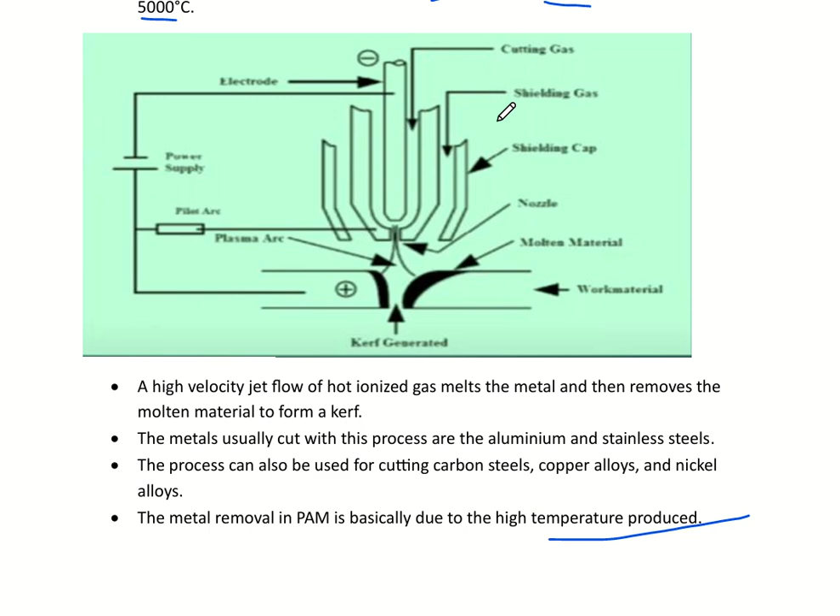This is due to anode heating. Why is it called anode heating? Because as you can see from the circuit, the workpiece is the anode part and the electrode is the cathode part. So it is the anode that is getting heated. The heating of the workpiece results from anode heating due to direct electron bombardment, as the electrons are bombarded due to the very high velocity and high temperature plasma that accompanies it.

The heat produced is sufficient to raise the workpiece temperature above its melting point, and the high velocity gas stream effectively blows the molten metal away. The temperature supplied should overcome the melting point of the workpiece. Then the thermal machining process occurs, and the molten state is formed. The molten metal formed is removed by the high velocity jet from the gas supply. So this is actually machining, and the removal is done in the same process. That's a specialty of plasma arc machining.

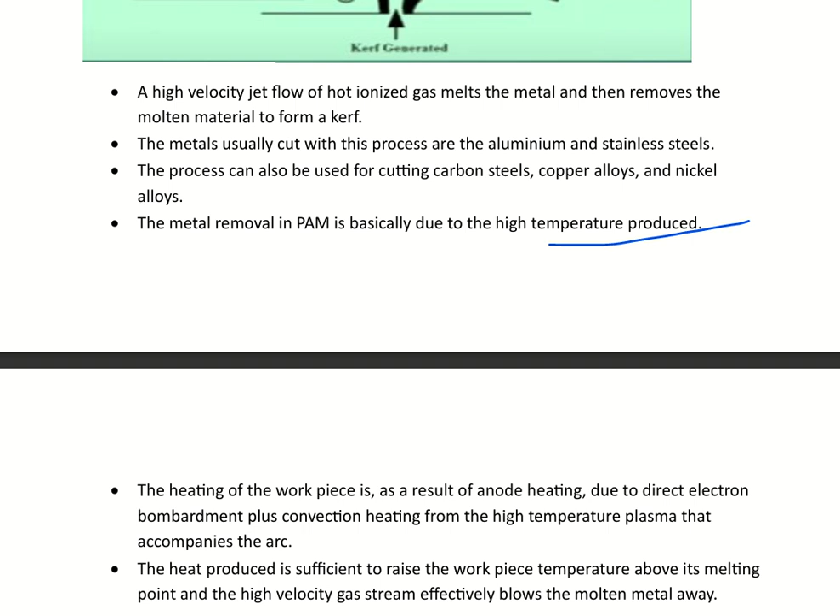There are two types of plasma arc machining: transferred plasma arc machining and non-transferred plasma arc machining. This is the figure of transferred plasma arc machining. Just like the figure, we have the electrode, a nozzle, and plasma gas. Look at the gas supply, you can see the plasma is formed there.

There is a workpiece. The major difference is that the plasma jet can be operated in the transferred mode, where the electric current flows between the plasma torch electrode and the workpiece. There is a continuous supply. The plasma torch electrode is the negative terminal of the power supply, so it is the cathode, and the workpiece is the anode. So there is a complete circuit; electric current flows through this circuit, completed from the plasma torch.

You can see the workpiece is connected to the anode, so obviously this will be a complete circuit. In the transferred system, the whole circuit, the arc, is complete by making contact to the workpiece. As you can see, the circuit is complete because the anode is connected to the workpiece. So the arc is completed by making contact with the workpiece. That's an important point of transferred plasma arc machining.

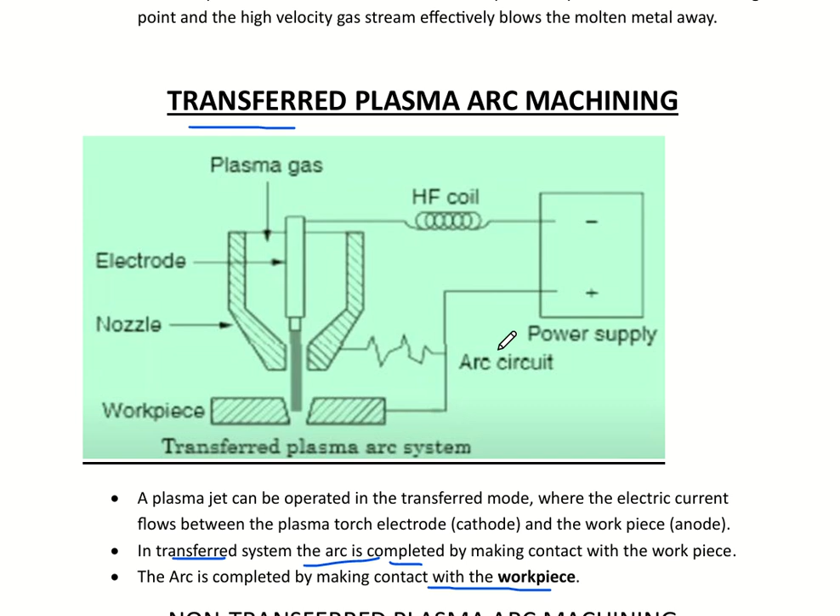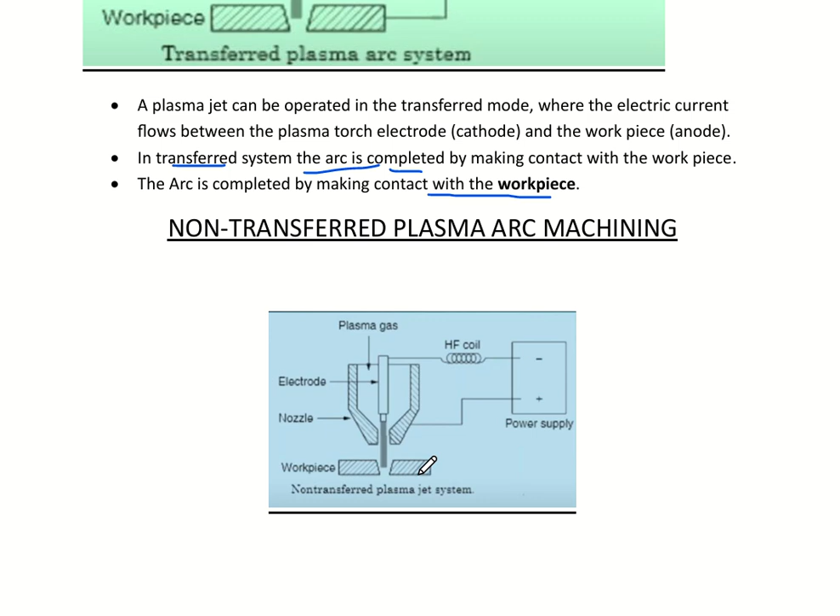The remaining working principle is the same as general plasma arc machining. In transferred plasma arc machining, the whole circuit arc is completed by contact to the workpiece. In non-transferred plasma machining, as you can see, the power supply circuit is completed with the nozzle, not the workpiece. The whole arc circuit is completed with the nozzle.

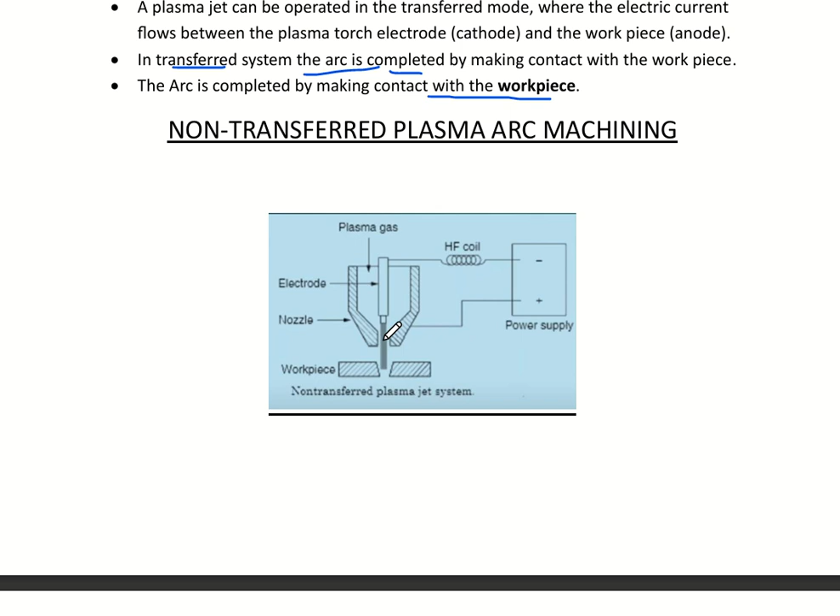A plasma jet can be operated in the non-transferred mode, where the electric current flows between the electrode and the torch nozzle. Here the current flows between the electrode, torch, and nozzle, whereas in transferred plasma machining it flows between the electrode, torch, and workpiece. That's the difference between transferred and non-transferred plasma machining.

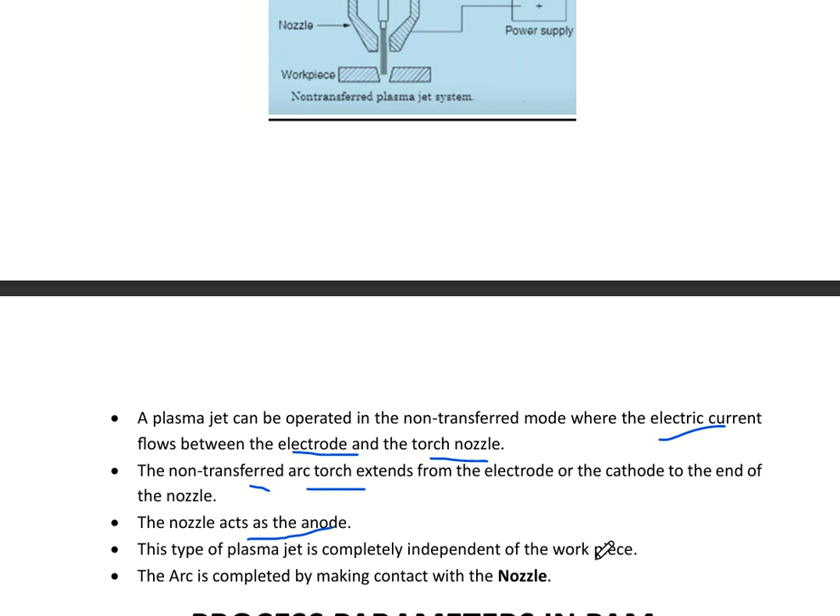In non-transferred plasma machining, the arc extends from the electrode or cathode to the end of the nozzle. The nozzle acts as the anode. In the previous case, the workpiece acts as the anode, but here, in non-transferred plasma machining, the nozzle acts as the anode. This type of plasma jet is completely independent of the workpiece, as you can see, it's not connected to the workpiece.

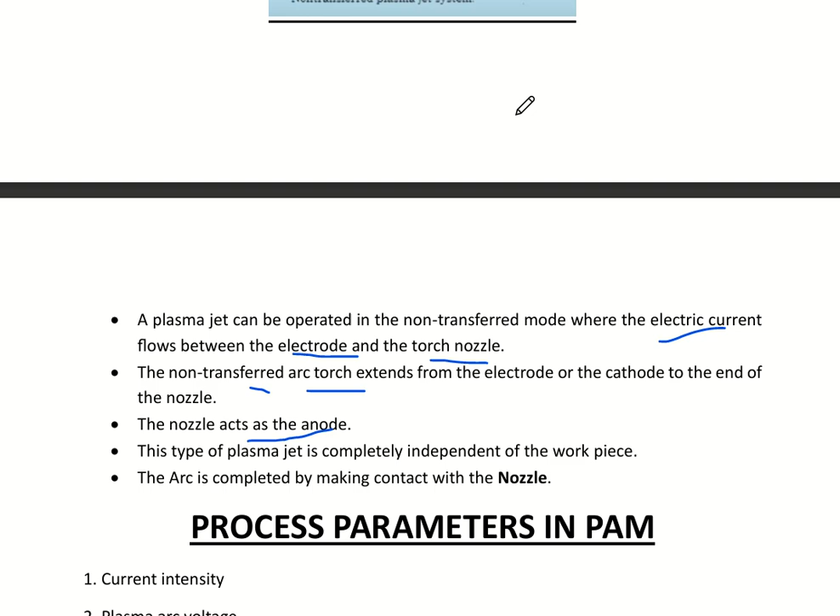The DC power supply is not connected to the workpiece, so this does not depend on the workpiece. The non-transferred plasma machine does not depend on the workpiece; the arc is completed by contact with the nozzle. These are the major differences between transferred plasma arc machining and non-transferred plasma arc machining.

Let's discuss the process parameters. What are the parameters that influence plasma arc machining? Obviously, current intensity of supply. The DC power supply depends on the intensity of the plasma, or the heat used for machining. The plasma arc voltage, then the properties of the workpiece, such as its melting point, the temperature at which it melts, obviously affects the machining. So the properties of the workpiece is one factor.

Thickness of the workpiece, whether it has larger or smaller thickness, is another factor. The gases used along with the electrode to form plasma, and the flow rate of the gas supply, as mentioned, the jet velocity or flow rate, is one of the influential factors. Then the working speed, the speed at which the whole machining process takes place.

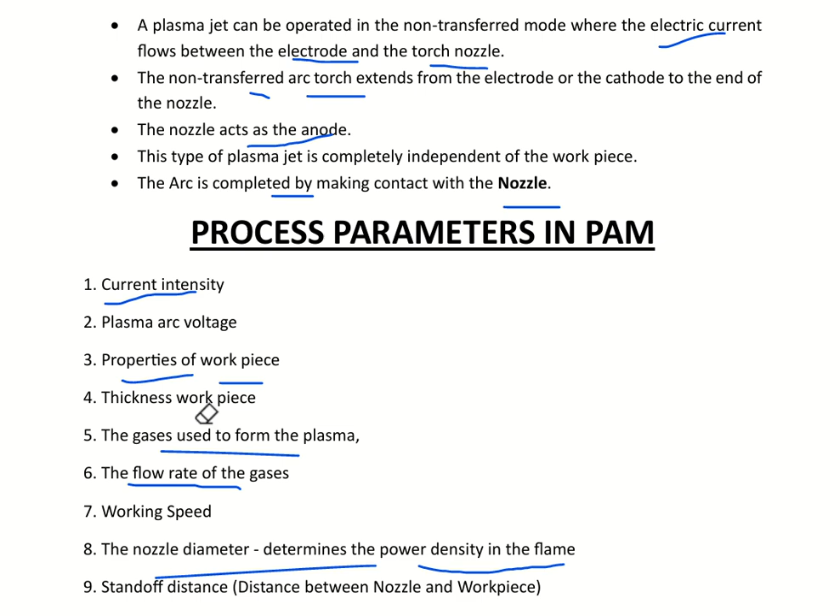Then the nozzle diameter, which obviously affects the velocity of the jet. The nozzle diameter determines the power density in the flame. If it has a very small diameter, it will have a very high plasma power density, so it could machine with very high intensity on the workpiece. Then the standoff distance, meaning the distance between the nozzle and the workpiece. These are the process parameters in plasma arc machining.

Up next, the material removal rate. This is a thermal machining process, so metal removal takes place in a very large quantity. Metal removal rate increases with the current, but also depends on the cutting speed, gas flow rate, and thickness of the work. These are different factors that influence the metal removal rate.

It is directly proportional to the current supplied for machining, and it also depends on the cutting speed and other factors such as gas flow rate and thickness of the workpiece. The supply of current range required for this metal removal rate is 800 ampere to 1000 ampere.

Higher the value of cutting speed, more the volume of material removed. If you're having very high cutting speed, more material will be removed. So the volume of material removed is higher with respect to the value of the cutting speed.

Cutting speed depends on the thickness of the workpiece material you are cutting, the workpiece property, and surface speed of the material. If you have to use a very large cutting speed, you have to look at the properties of the workpiece, whether it has a small or large thickness. The workpiece material property affects the cutting speed, and a proportion of 10% hydrogen, 90% nitrogen usually gives good general results.

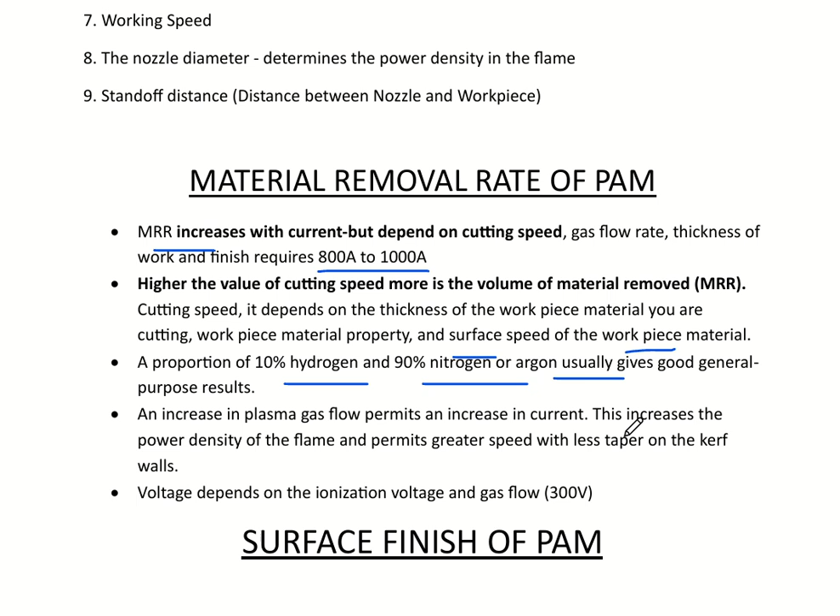These are the process parameters for a better metal removal rate. An increase in plasma gas flow permits an increase in current, and this increases the power density of the flame, permitting greater speed with less taper on the kerf walls. There will be taper on the kerf, which I will explain in the next slide. Voltage depends on the ionization and gas flow. So this is all about the metal removal rate and certain factors related to it, and how it influences metal removal rate in plasma machining.

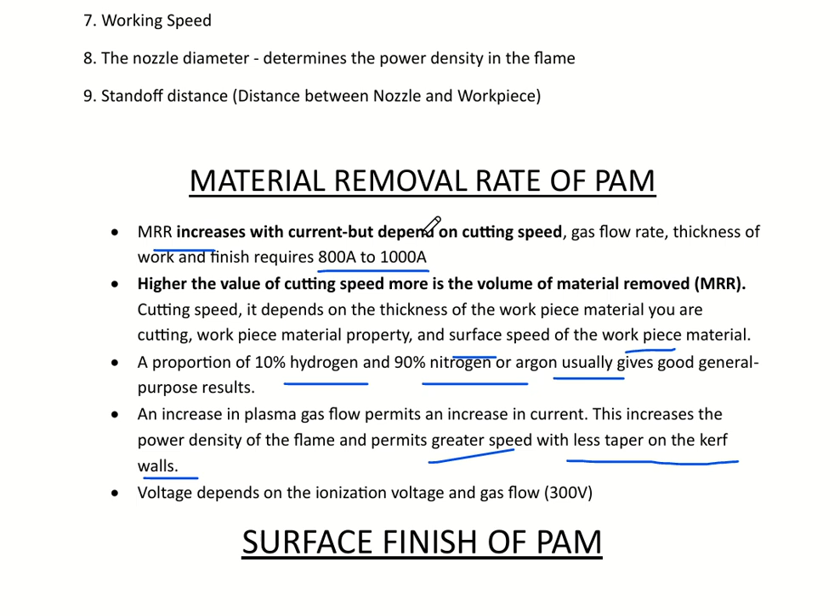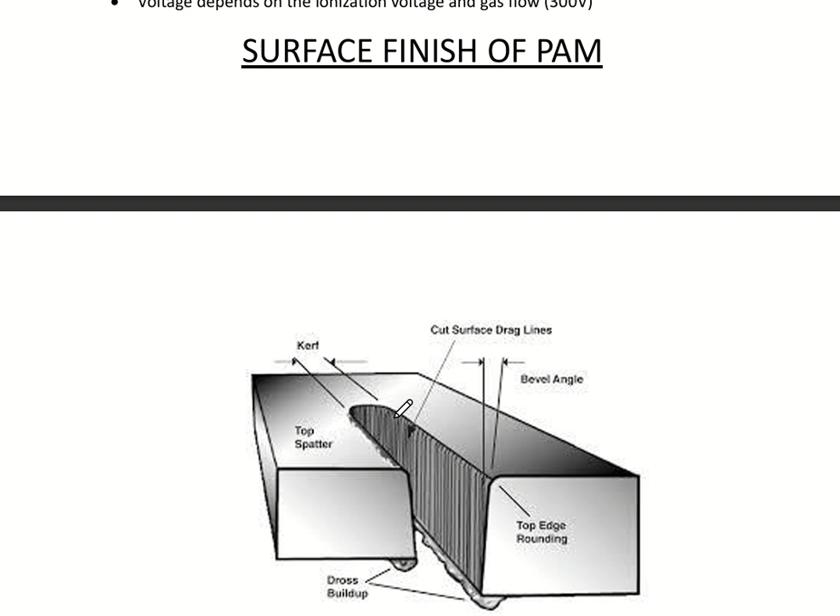Then surface finish of plasma machining. This is a machined surface, and this part is what is called the kerf. You can see this part is machined, and the machining is usually in a tapered manner - it could not be a perfectly straight cut. So there's a tapered manner down here; this cut part is called a kerf in plasma machining. The quality of cut and dimensional accuracy produced by plasma machining can be assessed by measuring the kerf width, depending on how much kerf width we are machining.

The heat affected zone, the surface finish and the metal removal rate are all factors that determine the quality of cut and the dimensional accuracy of a machined workpiece in plasma machining. The arc current and arc voltage are found to be the most significant parameters among many factors determining the quality. Other factors include torch standoff - the distance between the torch and workpiece - angle to work, and depth of cut.

A lower value of current and voltage was found to produce better surface finish. An increase in thermal content of the arc was observed to spoil the surface finish and increase the kerf width with an increase in the heat affected zone.

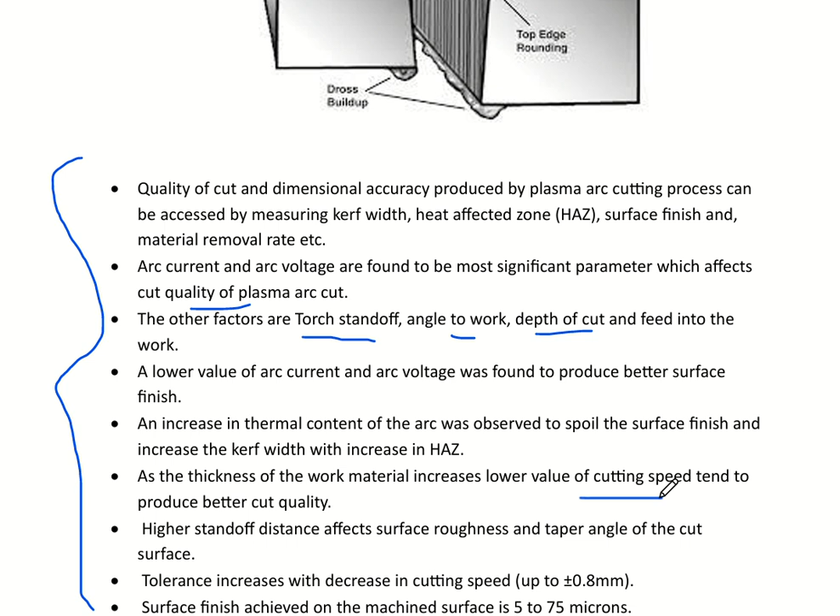As the thickness of the workpiece increases, a lower value of cutting speed tends to produce better cut quality - the machining process will be much slower, but you will get a better cut quality. If the thickness of the material is very large, you should use a lower cutting speed to get better quality. Higher standoff distance affects surface roughness and the taper angle of the cut surface.

The tolerance increases with a decrease in cutting speed - tolerance meaning you won't get a perfectly precise cut; there will always be some tolerance range, and it decreases with cutting speed. Surface finish achievable on the machined surface ranges from 5 to 75 microns.

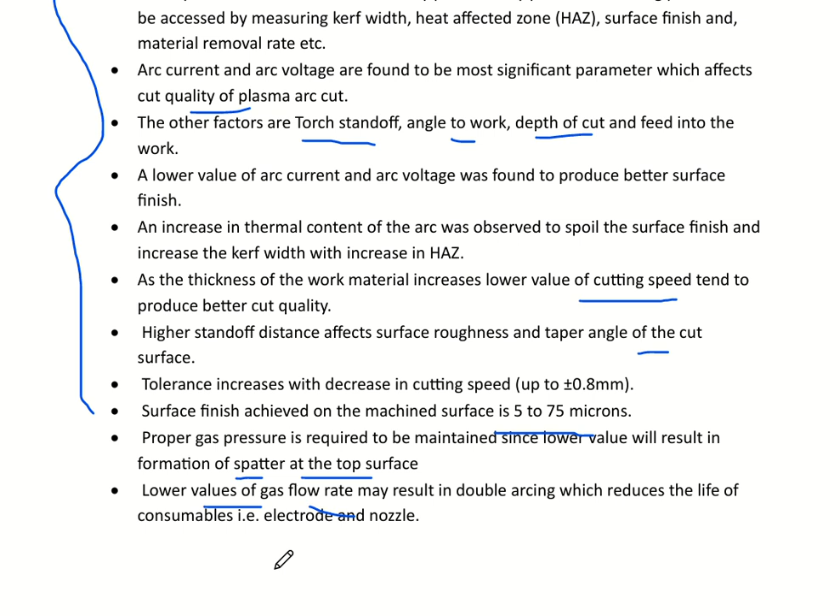A proper gas pressure is required to maintain quality, since a lower value will result in the forming of spatter. The gas should be supplied at a proper pressure rate to achieve better quality. A lower value of gas flow rate may result in double arcing, which reduces the life of the consumable - so using a very low gas flow rate would result in double arcing, meaning the electrode won't have much life, affecting its working.